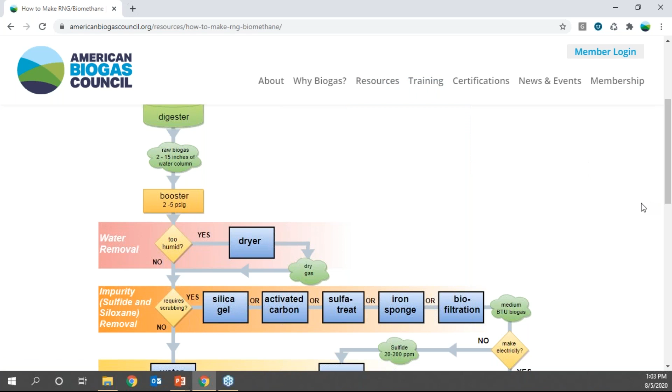We were talking about this a little bit yesterday, and just to put their technology into perspective here, Caroline, if you could go to the flow chart. Their technology is all about biogas upgrading and removing sulfur elements from biogas. If you haven't been to this part of our website, under resources and RNG, there's a flow chart we have for making RNG and biomethane from either digester gas or landfill gas. We've broken down in a very technology agnostic way the different steps and types of technologies that can be used to clean up your biogas to get it to either pipeline quality or maybe a medium BTU quality for vehicles. What we're going to be talking about today is one of the technologies in the orange bar for removing sulfide related and sulfur related impurities.

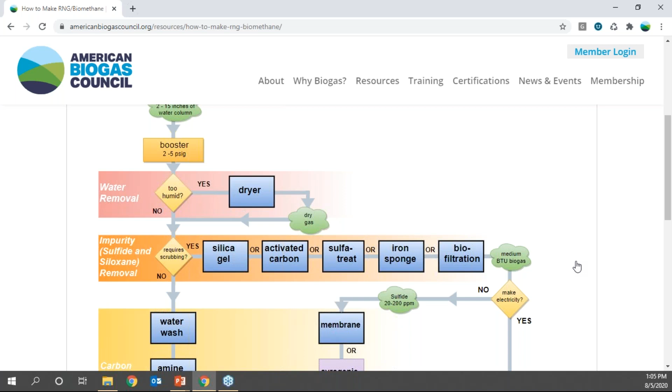One of the nice things is that they don't add oxygen to the gas in the process. So if you're trying to get up to pipeline quality, you don't have to remove that oxygen later to meet your pipeline spec. They've been around for a really long time - they are the original developers of this technology. My understanding is there are a few other companies similar to what they do, but they're very proud of the fact they developed the technology originally themselves, and they'll be able to speak from that experience with many different deployments around the world. We're very grateful to have them as members and to have them with you today.

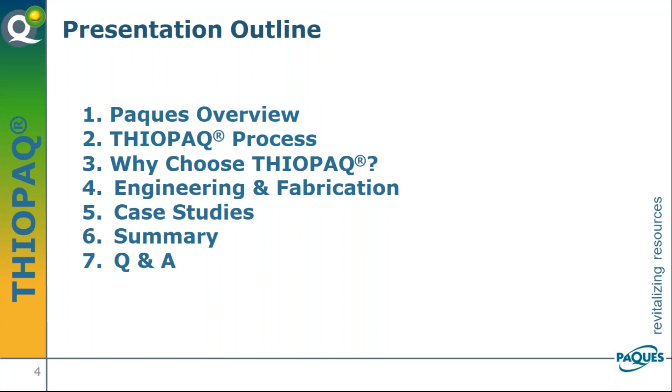This webinar will consist of an overview of Paques, which I will present. Then Andrew, my colleague, will get into the details of the Thiopaq process. I will take over again to discuss why to choose Thiopaq. Andrew will present a summary of the engineering and fabrication details of the Thiopaq systems, and then we'll both present case studies and summarize this webinar with conclusions. I'm going to turn the camera off now, and then we'll get into the presentation.

Paques is a global company. We're big into solving environmental issues, especially wastewater treatment and gas treatment. We were founded in 1960. We got into anaerobic digestion, manure digestion, actually already in the early 70s. But from that grew into anaerobic treatment of industrial wastewater. We're the world leader in that, with about 1,500 plants worldwide.

That anaerobic treatment is mainly to clean wastewater, not so much about biogas production, but of course those plants also produce biogas. From there we got into Thiopaq technology, and that's why we're presenting this webinar today. Our head office is in the Netherlands with about 100 people, and roughly 200 people in our Shanghai office. Also a large office in Chennai, India, a large office in Piracicaba, and our office in Burlington, Massachusetts.

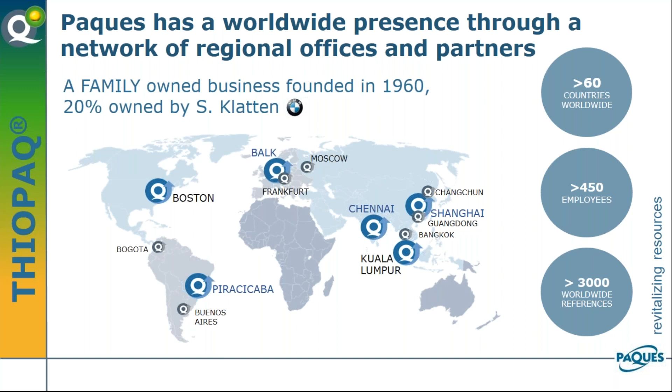The company is family owned, but with a 20% share of Mrs. Susanne Klatten, who is a major shareholder of the BMW company.

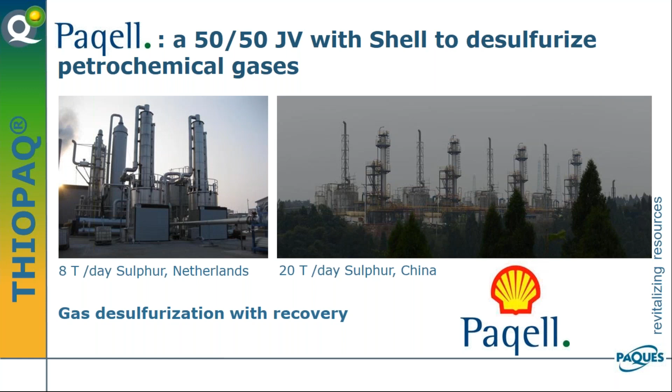We also have a joint venture with Shell. This company is called Paqell for desulfurization applications in the oil and gas industry. So we've done maybe 15 projects or so as Paqell, including projects in the US and Canada with several oil and gas companies.

Paques is known for its biotechnical solutions of wastewater problems and gas treatment. We always work with natural bacteria, so no genetic modification. In the early 80s, we got into high rate anaerobic treatment. We developed several technologies since then, making them more efficient and with smaller footprints, resulting in very slender and tall reactors. Sometimes people call these reactors digesters, but they operate at a retention time of several hours instead of weeks, like a traditional digester.

But remember, these are for industrial applications. We're also into ammonia removal from wastewater - that's our Anammox line, an alternative to conventional nitrification and denitrification. And then, of course, the Thiopaq for hydrogen sulfide removal from biogas and landfill gas. We also have other sulfur technologies - for example, we remove sulfate from polluted groundwater or mining effluent, and as part of that we often convert it into hydrogen sulfide to be able to remove it from water, often by converting it into elemental sulfur.

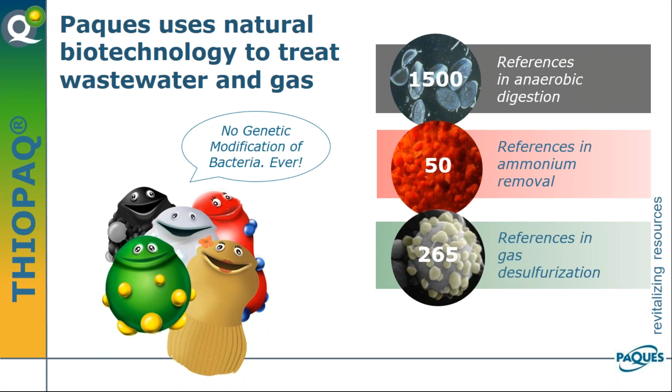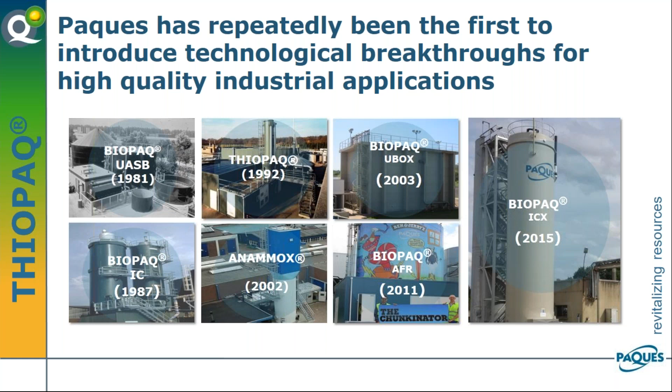These are some pictures of our anaerobic reactors. The UASB goes back all the way to the early 80s, a very well-known technology, up to IC reactors - very slender and tall reactors, up to about 90 feet tall. And nowadays our ICX reactor, a follow-up of our IC reactor. These are used for industrial wastewater treatment - wastewater that doesn't contain a lot of solids, but does have a lot of organic material.

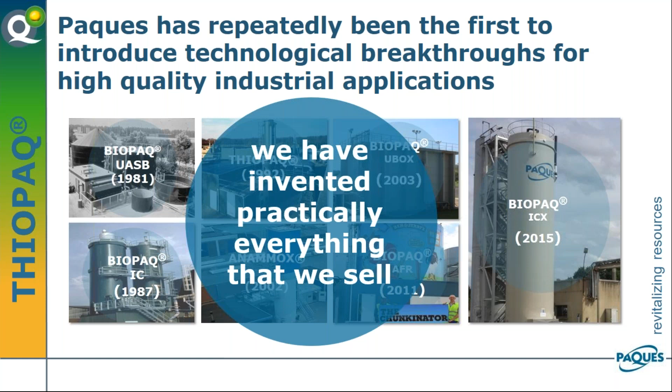Paques has invented most of its own technologies, in cooperation with several universities in the Netherlands and research institutes. We spend a significant portion of our revenue in R&D, and as a result we've been awarded many awards. The latest big thing we're working on is production of bioplastics from organic material in wastewater.

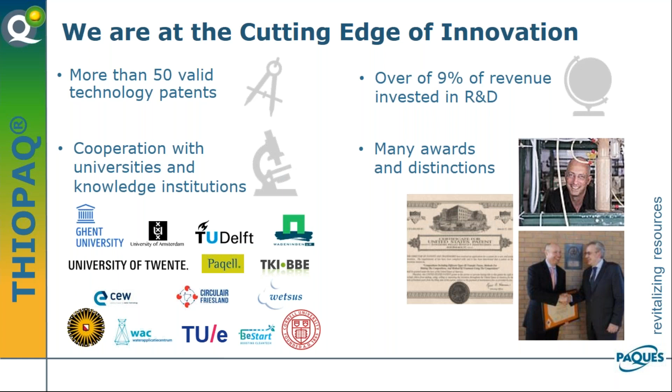Of course, we're here to talk about hydrogen sulfide removal. Probably everybody knows this, but just to capture it: hydrogen sulfide is very toxic, corrosive for equipment, and gets converted into sulfur dioxide upon combustion. So in most cases where you want to use biogas, or even if you just want to combust it, it needs to be removed to meet environmental regulations or to protect equipment. The norm for pipeline gas quality in North America is it should be less than 4 ppm.

Gas engines typically require less than 250 ppm H2S to prevent damage, though it varies. Some gas engines or operators accept more, but that generally results in more maintenance or damage to the engine. Boilers, depending on type, may accept up to 1,000 ppm, though many times they need less than 500 ppm.

Our scrubbers typically take the H2S concentration down to less than 25 ppm. It can be reduced further, but usually it's most cost effective to then polish it with a media-based system to get to very low levels.

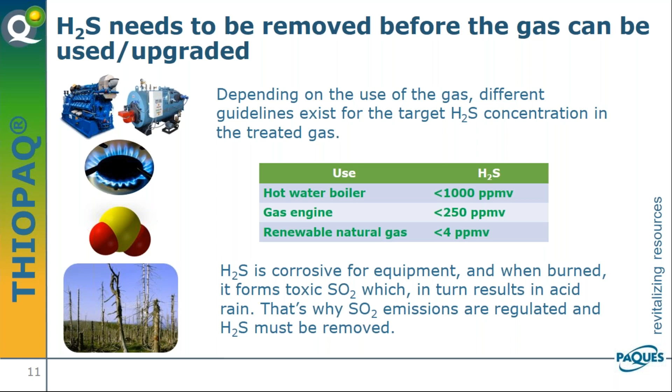Now we'll get into the Thiopaq process in the next slide, please, and then next one.

Sometimes our Thiopaq is called a biological scrubber, even though we ourselves have been culpable for that. But really the scrubber itself is a chemical scrubber, because we use a caustic solution to absorb hydrogen sulfide in the liquid. It's a very dilute solution with a pH of 8 to 8.5, highly buffered by sodium bicarbonate.

I'll describe the process very roughly here, because after this slide Andrew will continue with the details. Hydrogen sulfide is absorbed in the liquid in the scrubber. This liquid flows by gravity from a sump underneath the scrubber to the bioreactor. In this bioreactor, we have a culture of Thiobacillus bacteria. We add a very controlled amount of air to the bioreactor, and the Thiobacillus bacteria oxidize the sulfide to elemental sulfur. Andrew will show that this reaction results in the production of hydroxide.

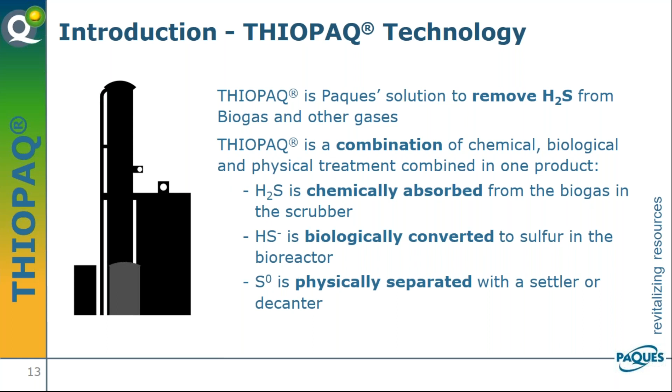For larger applications, say more than roughly 1,000 pounds of sulfur per day, we typically use a decanter, which adds a bit of cost to the system but also results in even lower caustic consumption. Altogether, the big advantage of the technology is that it has the high removal efficiency of a chemical scrubber system, but the low operating cost of a biological system, because we regenerate caustic. Typical caustic use, depending on the application, is somewhere in the range of half a pound to 3/4 of a pound of 100% caustic per pound of sulfur. That makes this system very attractive.

The next slide, please.

The Thiobacillus is a very interesting bacteria. It is a so-called chemolithoautotrophic, halotolerant SOB, and SOB stands for sulfur oxidizing bacteria. It's not what you think. A picture is shown in the top corner on the right, showing one bacterium where you can see how it excretes the elemental sulfur that it forms.

This bacteria is isolated from soda lakes. It's a naturally occurring bacteria that can tolerate very high salt concentrations, which occur in the Thiopaq system. This allows it to operate at these high salt concentrations, meaning we have only a very small bleed stream, which helps assure a very low caustic consumption.

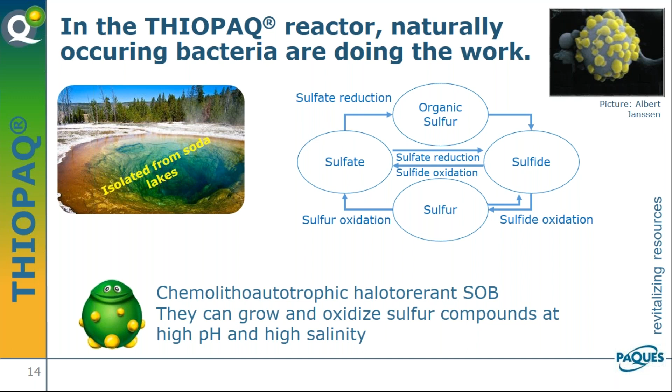With this, I'll hand it over to Andrew, my colleague, and we'll continue with the process. Okay, thanks, Martin. Next slide, please.

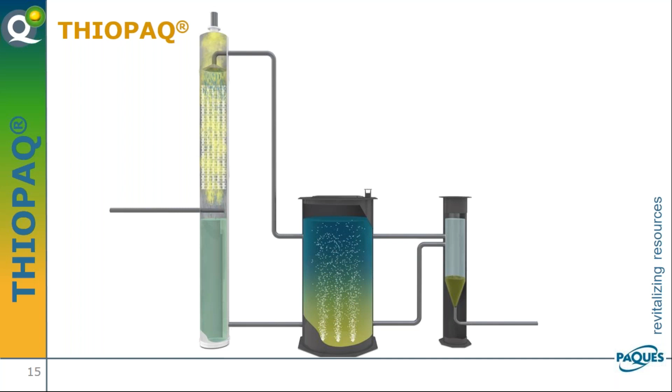This is just a basic schematic of the Thiopaq process. As Martin mentioned, it has three main process components: a scrubbing tower, a bioreactor, and a settler where the sulfur is removed. I'm going to drill down into these steps in the subsequent slides. Next slide, please.

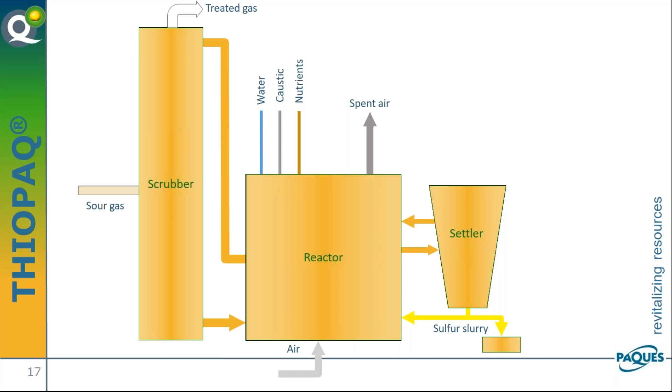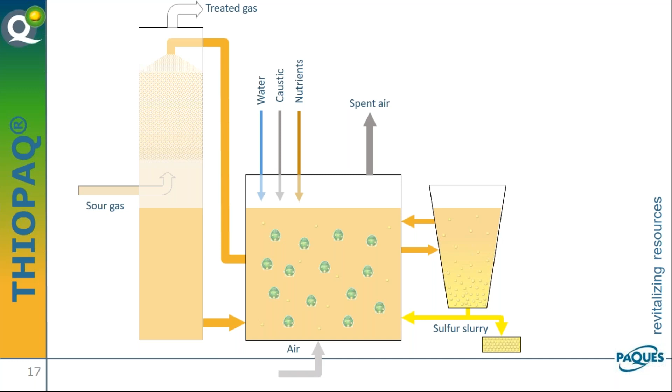The basic process is that the gas containing the H2S enters into the scrubber section, and as Martin mentioned, it's chemically absorbed into an alkaline liquid stream, converted into bisulfide. Once the bisulfide is in solution, it's transferred from the bottom of the sump into the bioreactor.

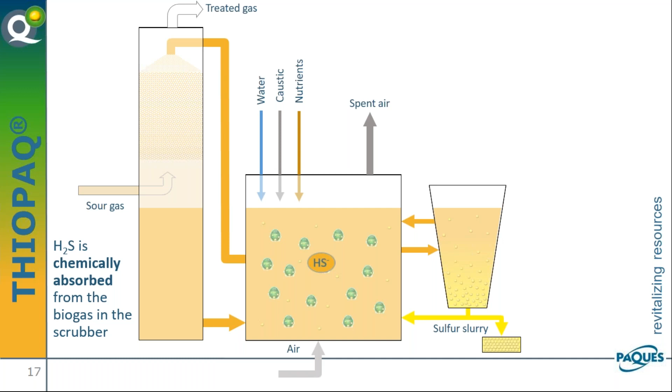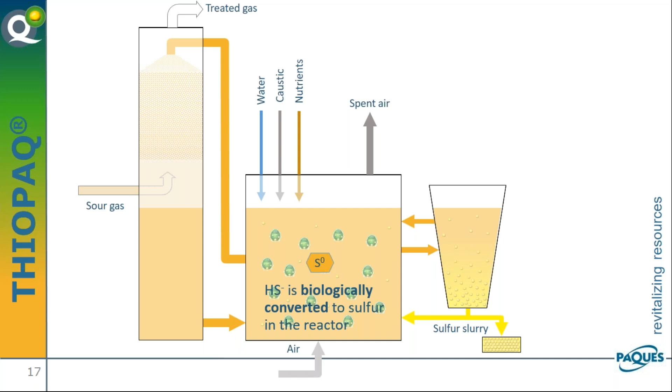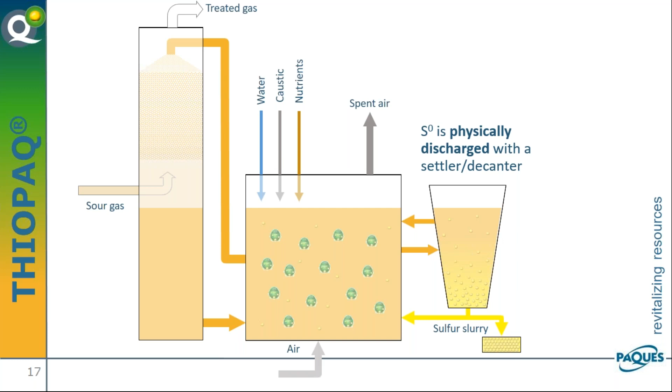Inside the bioreactor is where the hydrogen sulfide is biologically converted to elemental sulfur. A continuous flow from the bioreactor feeds a settler, where the sulfur is allowed to settle by gravity and then is removed from the process. That's the basic process flow, and I'll break it down further into these three components.

In the scrubber tower, it's nothing more than a gas liquid contactor that contains plastic media to provide a high surface area so that absorption of H2S into the liquid phase happens efficiently. The scrubbing solution rains down from the top of the column, goes through the packing section where the liquid comes into contact with the gas traveling upwards, countercurrent to the liquid stream.

The H2S is absorbed in the liquid stream as bisulfide, and the treated gas leaves out the top of the scrubber, and the liquid gravity flows to the scrubber sump, then back to the reactor.

So as you can see from the reaction, and as Martin mentioned, it operates like a chemical scrubber where it's consuming the alkalinity in that conversion to bisulfide. Also note here that there is no oxygen that enters into the scrubber during this process at all. The only oxygen is added in the bioreactor, which I'll talk about next.

So next slide, please.

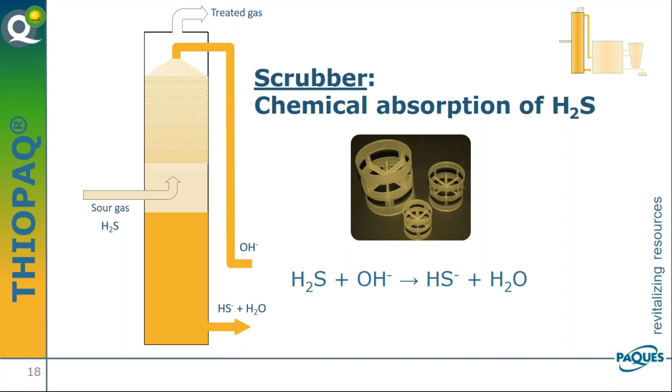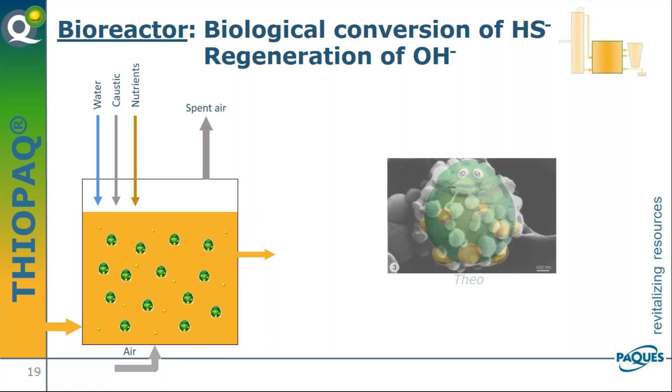So the bioreactor is where the bacteria resides and where all the magic happens with this process. The Thiobacillus bacteria, or better known as Theo, converts the hydrogen sulfide into elemental sulfur. So basically, the process is a biological process. The hydrogen sulfide is consumed, and then the elemental sulfur is excreted out of the bacteria.

The process is slightly exothermic, so we do need to be mindful of temperature. There is a heat exchanger inside our equipment container to maintain the proper temperature, which is around 95 degrees Fahrenheit. We also have a blower that provides air at a very precisely controlled rate through diffuser grids that are at the bottom of the bioreactor.

We also continuously monitor ORP of the solution, and that provides the control of the airflow of the blower speed. We also add a proprietary blend of Paques micronutrients to the solution to keep the bacteria happy and the biological conversion predominant, because you can get chemical sulfur formation, and that's undesirable. So we try to keep the optimum conditions for our friend Theo to do what he needs to do.

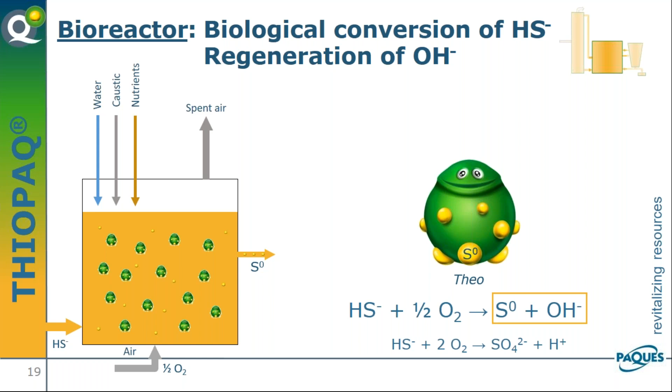I also want to point out that the bacteria and the sulfur particles are hydrophilic. We're running at around 10,000 ppm of solids inside the reactor, and so it all stays in solution. We don't have any problems with plugging because of the nature of these particles. They are hydrophilic, but problems can arise if we're forming too much chemical sulfur through just chemical oxidation of sulfide. That can tend to plug, but by precise control of the process, we're able to maintain favorable conditions in the bioreactor and throughout the scrubber.

Okay, next slide, please.

As I mentioned earlier, the purpose of the settler is to separate the sulfur particles from the liquid and return the liquid stream back to the bioreactor. A small stream from the bioreactor is continuously transferred to the settler, and the solids just gravity settle to the bottom, and the liquid overflows back to the bioreactor, and thereby we recover the alkalinity that's associated with that liquid stream.

Otherwise, we would lose that alkalinity and it would be a waste stream, but that water still has some value, so we want to get it back into the reactor. The sludge at the bottom of the settler is also continuously returned back to the reactor, but occasionally those solids are wasted from the system. The reason we continuously return it is because we want to keep these solids moving.

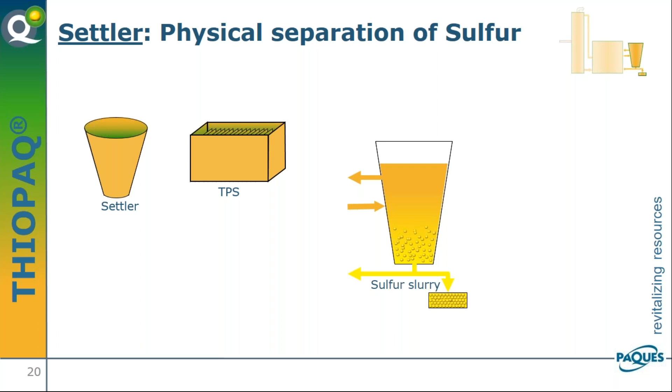So for most applications where the sulfur loads are not so heavy, we'll use just a simple cone bottom tank. For applications where the sulfur load is heavy and we have to manage a lot of solids, we'll use a centrifuge for dewatering. For larger applications, we'll use maybe a centrifuge, and if there's something in between, we may go with a lamella type plate settler to give us good separation. So those are the kind of in-between applications.

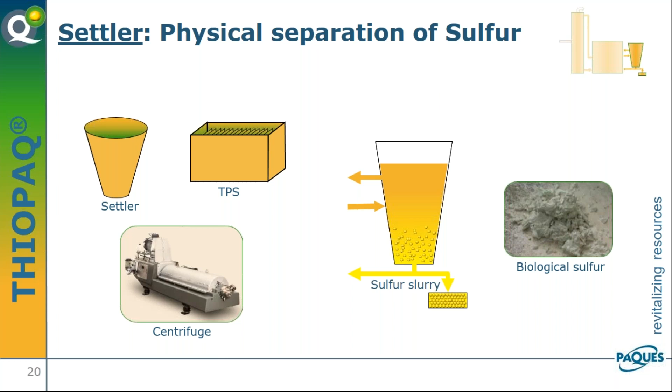So as I said, in a settler, we'll typically get 7, maybe 10% concentration of solids. In a decanter or centrifuge type of arrangement, we can get upwards of 60% or so solids concentration.

So as Martin mentioned, we do get a very high performance out of the scrubber. We can get less than 25 ppm H2S. If you want to incur some higher operating costs, when we have some installations where maybe you run at a higher alkalinity than design, we can get very, very low single digit H2S concentrations. But 25 ppm is generally very doable, and we can provide process guarantees to achieve that. It's a very reliable process with very high uptimes.

Besides having a very stable process, we have standard rotating equipment, pumps, blowers, valves, instruments, etc., that need to be maintained. But we do recommend having critical spares on hand for some of the long lead type items in case there's a replacement that may be required.

One of the key selling features here is the low operational cost. There's no media to replace. Most of the alkalinity is regenerated, and the sulfur is easy to handle. It can generally be put onto land as a soil amendment, or disposed otherwise as a non-hazardous waste. The other main selling feature is that no air is added to the biogas in this process. So safety issues are minimized, and you don't need to remove nitrogen or oxygen downstream in your upgrading process, just the CO2.

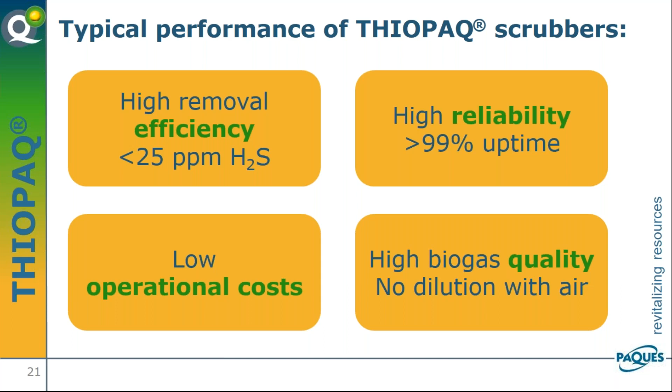So some of the key information that we're looking for when we're designing these systems for you is obviously, we need to know the gas flow. We would like to have average, maximum, and minimum gas flows and H2S concentrations, as well as any special turn down requirements. These systems don't have an infinite turn down, so we like to know as much as possible how the flows and loads in your application might fluctuate, throughout the day or through the season or through a startup, so we can design accordingly.

Maybe you're collecting gas from a cluster of dairies, and not all the dairies are producing biogas yet, and they'll be coming online at various times. So that's good information to know, because we do need to account for low loading conditions at startup, and then as things get online, we can turn things up as needed.

Inlet pressure and temperature are also important to know. It's also very important to know if there are any toxicants like VOCs or volatile fatty acids or solids that might be present in the gas stream.

Keep in mind, we're often the first step in these upgrading processes. So these scrubbers, they act like a big washing machine. Anything that's in the gas stream, these undesirable compounds, they'll just get washed into the scrubber and end up building up in the bioreactor and start to adversely affect the process. So we deal with these compounds by...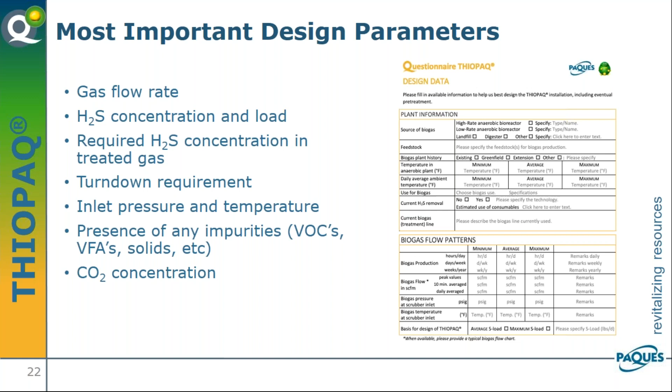Let me just mention real quick here, if I went over that too quickly, if you want to reference, go to YouTube and search for Thiopaq, Paques Thiopaq, and there's a nice little animation video, about 3 or 4 minutes, that kind of goes over the Thiopaq process.

Okay, so I'll turn it back over to Martin, and he can talk about why you should choose Thiopaq. Yeah, thanks, Andrew.

The sulfur that is generated is very pure, typically 99% pure, and it can be used as a fertilizer. Paques is setting up a network to recover sulfur from many facilities, to be able to use it as a fertilizer.

So please, next slide.

So why would you choose a Thiopaq scrubber for your desulfurization project? Well, first of all, it has a very wide application range, and I'll show that in a few slides. It's a robust and reliable technology that's been around for almost 30 years.

Some people don't like biological processes, but all the hydrogen sulfide is produced by bacteria, and there's nothing wrong with removing it with bacteria either. These bacteria live naturally under very tough circumstances, and under the conditions we apply they're very fast growing. Should there be a mishap, these bacteria can actually be stored and survive for months without feeding, just by setting them aside in totes.

And should something go wrong, you can very quickly reseed your bioreactor and start up again. The reliability, our uptime for most plants is 99%, and in certain cases, if certain conditions are met, we can guarantee an uptime.

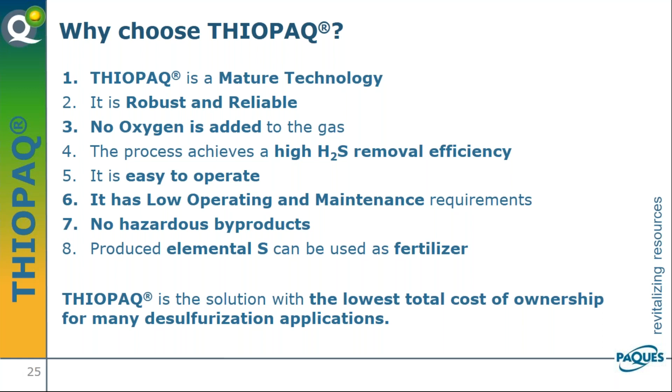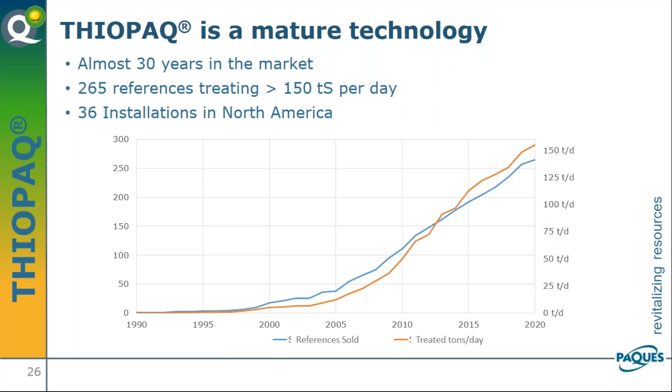It shows the number of units installed since the first one. The first one was installed in 1993. By now, a total of 265 have been sold, with about 10 or 15 underway, and a total of approximately 150 metric tons of sulfur per day is removed worldwide. In North America - US, Canada, and counting Puerto Rico - we have 36 installations. Next slide.

So our applications, in terms of sulfur load, landfill takes up the biggest part of it, because landfills where we have systems tend to have very large flows, and sometimes also very high concentrations. Not always - they can also have like 700 ppm or so, but they typically have very high flows. The pulp and paper industry, that's where our first one was installed. The gas flows are not as high, but they tend to have like 1% or so hydrogen sulfide in their gas.

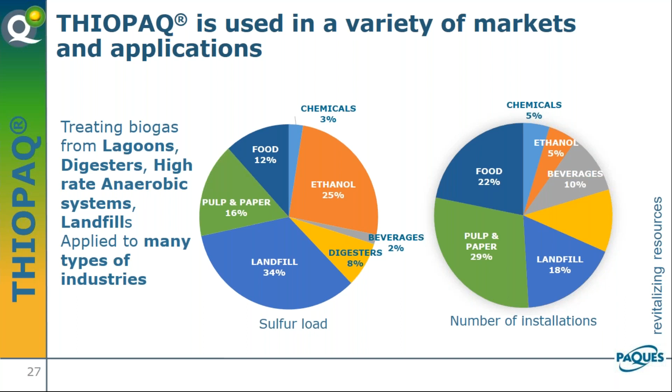And then many other applications in the food industry, ethanol industry, chemical industry also, and then digesters. There's not that many in digesters yet, but this is, of course, a very big market now, where all these big dairy digesters that produce biogas - that's a very good application for us. Next slide, please.

So where is the Thiopaq applicable? Anywhere where the hydrogen sulfide concentration is more than 500 ppm in gas, I must say, and not in air, because there's just too much oxygen in air. So in gas, more than 500 ppm. When it becomes attractive depends on other factors as well, but the minimum load would be about 60 pounds per day.

And just to give you an idea, we think that the total cost of ownership within a 3 year time frame or so is less than a media-based system, if you are dealing with a sulfur load of about 150 pounds per day or more. The pressure range is basically - well, we operate some landfills at minus 200 inches water column, and in the oil and gas industry, we have a plant running at 75 bar or 1,000 psi.

The bacteria don't really care about this pressure, but of course the scrubber column has to be designed properly for it. A typical turn down ratio for our plants is 4:1, but if we know ahead of time that more turn down is required, the maximum turn down ratio is a factor of 10.

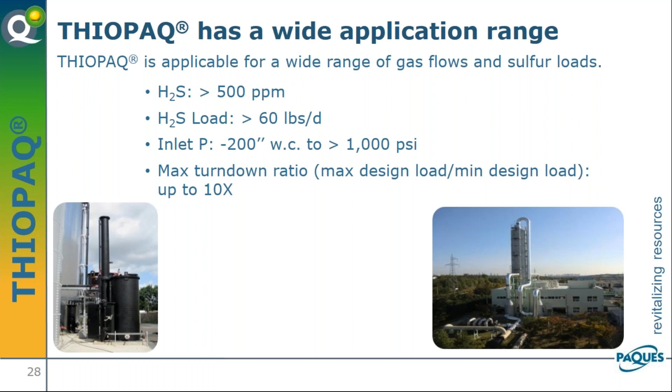If you get into very large sulfur loads or very high flows, we cannot use these standardized units anymore because the pumps get too big, and many times a decanter is required. So we then do all the process engineering and provide all the process equipment, like all the vessels, the pumps, the heating and cooling equipment, instrumentation, etc., and do the commissioning and startup.

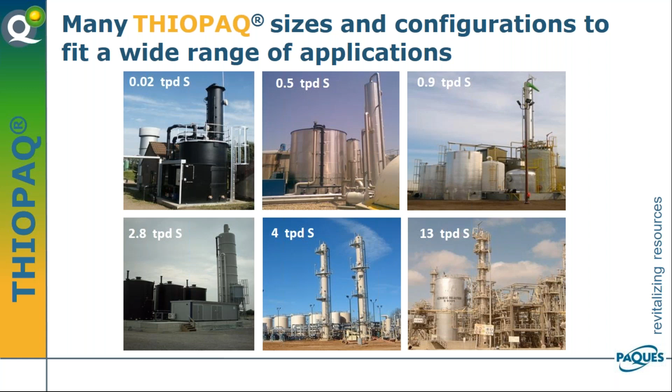We already talked about low operating and maintenance requirements. So besides the chemicals, utilities required are some makeup water, power, some instrument air, and for most applications you need either some heating or cooling, but it's not always required.

The waste stream produced for smaller applications, like the typical cow manure application, gives you a slurry from the settling tank that has 5 to 10% sulfur in it, plus some salts, and that can be blended with a digestate, for example, or if you have an aerated lagoon, it could be discharged there.

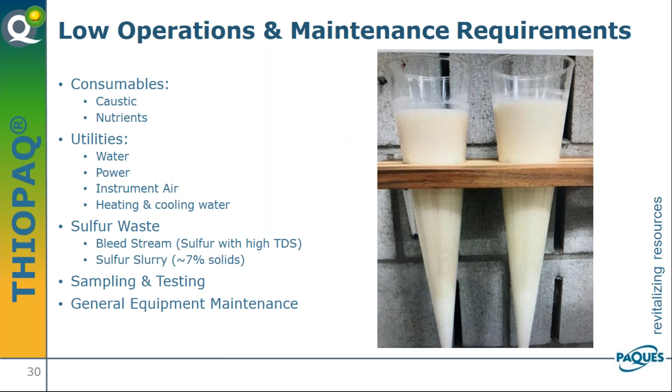I would say the major advantages, if you summarize it, is we have a reliable system that provides high uptime. There are unfortunately also some copycats - several companies in the U.S. and also outside, in Europe and China, everywhere, that copy these systems, but often the fundamental knowledge is not there to guarantee a very reliable system. And if you have any amount of downtime, it gets very costly if you produce RNG. So I think we have a big advantage there.

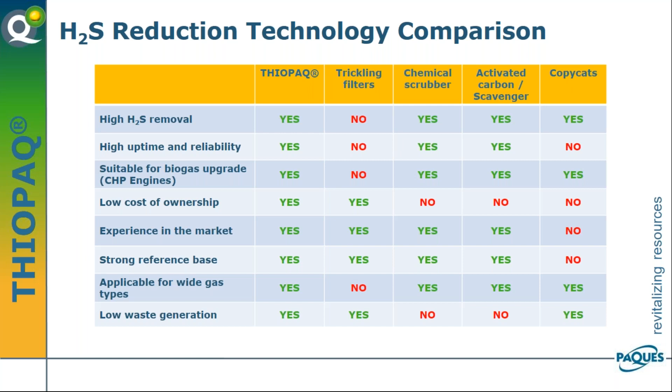So I wanted to make a couple of points that maybe I glossed over before. As Martin mentioned, we have several sizes. There's some standard sizes, but also multiple configurations. Generally, the diameter of the scrubber is determined by the gas flow. The more gas flow you have, the bigger diameter you have.

The bioreactor is designed based on the loading. If you have a lot of pounds of sulfur coming in on a daily basis, the bioreactor is bigger, the blower is bigger. But there's some cases where we can have multiple configurations. You'll see in some of the case studies, you can have 2 trains, a scrubber with 2 bioreactors, or 2 scrubbers with 1 bioreactor. There's really an endless way to configure these things to meet the requirements of the project.

As far as engineering and fabrication, with Paques you get a complete comprehensive engineering package with our projects. We do a complete mass and energy balance. We have a process flow diagram with stream numbers, and each of those stream numbers gives you the constituents of that stream, so you can see how things change as you flow through the process. That's valuable information when you're integrating these RNG upgrading projects.

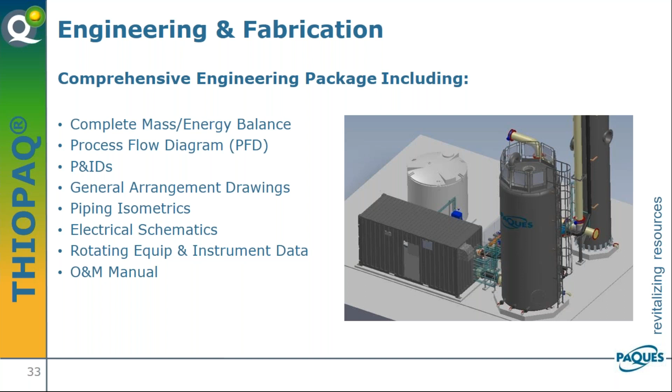So the tanks are typically made of fiberglass or HDPE. For some higher pressure or vacuum applications, we'll probably need a different material like stainless steel. But the majority of applications we're seeing in landfills and dairies are at relatively low pressures, operating at pressure, not at vacuum.

As I mentioned, the equipment is pre-installed inside a 20-foot high cube container. It's completely renovated. Everything's insulated, the walls, the ceiling are insulated. A steel floor is put in. We have HVAC, ventilation fan, air conditioning, heating, lighting, and a man door on the side. So all the major equipment is installed in here to the maximum extent.

And we use major equipment that you're used to seeing, that you'd expect in this kind of installation - Goulds pumps or Fybroc, Endress+Hauser instruments, that sort of stuff. So readily available parts.

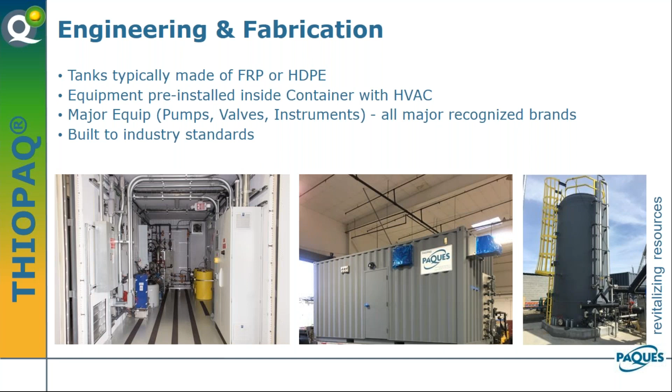As far as the controls, it's a fully automated process, PLC controlled. All the electronics are installed in a UL 508A panel. We use a Compact Logix Allen Bradley PLC with an HMI interface where all the operator functionality takes place. There's data trending where we can look at key variables and how they change maybe over a 24-hour period. It's a very nice interactive display to give the operator the data he needs and the ability to control everything that needs to be done.

We also have the ability, and we like to get a VPN connection. We have a network switch inside the panel where, if we get set up with a VPN, we're able to remotely access the controls. And if you get into a pickle, we can quickly respond and make whatever changes, help with troubleshooting, see what you're seeing in the field, and get you back on your way.

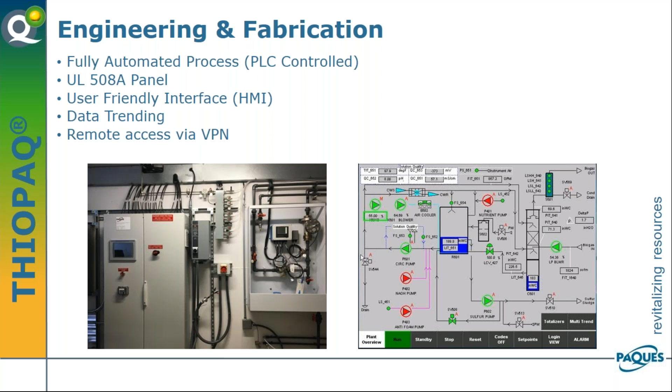Okay, so now we're going to go over some case studies and I'll flip it back over to Martin.

Yeah, I'll briefly discuss two case studies. First, this one - I selected it for two reasons. First of all, because it's our first plant that was built in 1993, and it's still in operation and doing well.

Something else that makes this plant very interesting is that it treats the biogas from an anaerobic reactor that treats effluent from three separate paper mill companies. So it sees a lot of variation in flow from these mills, because they can all of a sudden dump a lot of water and then nothing, and also variations in gas flow composition. Don't forget that these anaerobic reactors work at retention times of, I'd say, somewhere around 6 to 10 hours, so gas production can change dramatically within an hour.

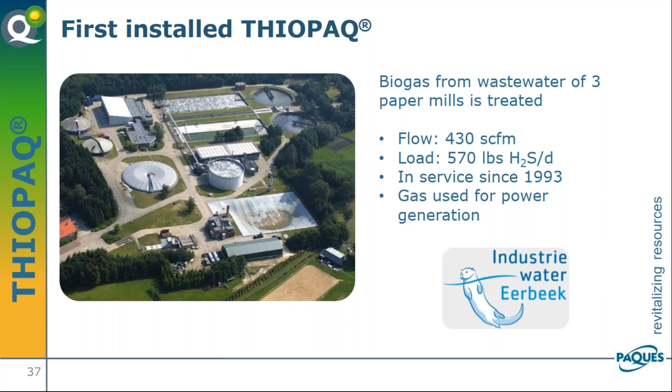So on this slide you see the Thiopaq, you see the entire treatment plant. The anaerobic reactor is kind of in the center with the white covers there. The Thiopaq is located nearby, it's kind of hard to see, but it's in one of the next slides. Next slide, please.

The name of that company is Industriewater. Here you see the results of the last 11 years of operation. The influent gas concentration varies typically between 5,000 and 10,000 ppm, and the outgoing concentration is generally less than 50 ppm. Over 11 years of operation, you just see a few hiccups, just indicating how stable this process has been working. Next slide.

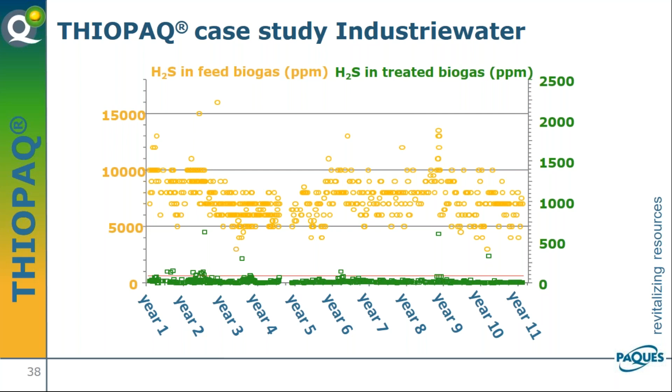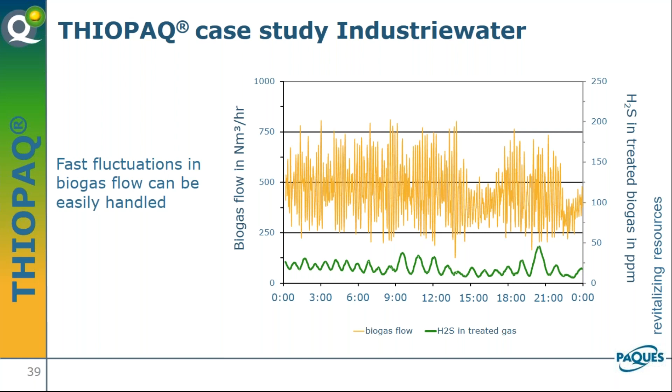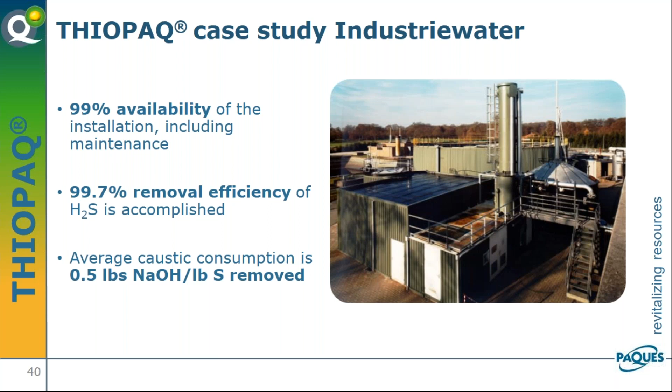The uptime of this facility has been 99%. The average removal efficiency is 99.7%. The average caustic use has been half a pound of 100% sodium hydroxide per pound of sulfur removed. Next slide, please.

This is a different plant, one of our more recent installs, at a landfill in Quebec. This plant was started up sometime in April last year, so it's been in operation for a little over a year. It was designed for 6,000 CFM and is treating all the gas, but getting on average a little less than that. These are average numbers for the last year of operation.

Hydrogen sulfide going in is 771 ppm on average. The design number was, I believe, 1300 ppm, so it's a little lower than design. We designed it to achieve less than 25 ppm, a number that we guaranteed. The actual number was 0.5 ppm or less, so I rounded it off to 0. The sulfur load is 530 pounds per day, and at this plant we have a decanter to dry the sulfur.

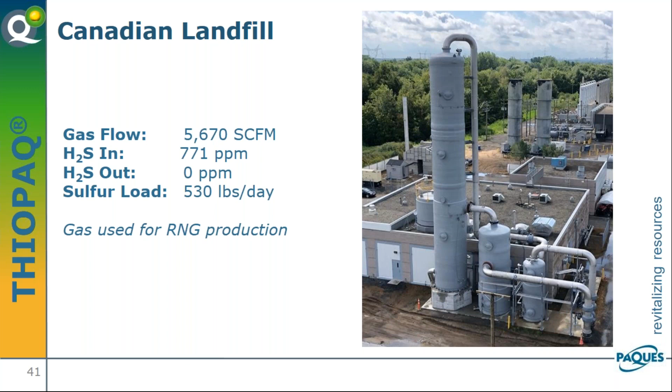I think that's it for me. I'll hand it over to Andrew again.

Andrew, your turn again. Okay, next slide, please.

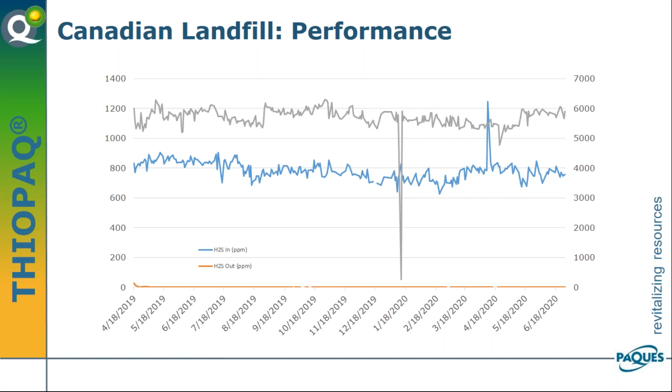So we have a Thiopaq installation at a large rum distillery in Puerto Rico that we recently commissioned about a year or so ago. It's already weathered a couple of hurricanes and is still standing and operating pretty well. In this project, the treated gas is used as a fuel source for the distillery's boilers, and it saves them quite a bit of money on fuel for their boilers.

As you can see, the loading on this system is quite high. It's designed to treat about 3,000 SCFM with H2S concentrations of around 17,000 ppm. The system was installed to replace an iron chelating type system where the customer was having issues with plugging due to high sulfur concentrations and just general solids management.

They had two large plate and frame filter presses that required a lot of labor and had higher than expected operating costs, plus general difficulty managing the process. So we came in and replaced that system with a Thiopaq process.

The distillery operates in a campaign mode where they'll run continuously for about 3 months, then shut down for about 2 weeks. During those 2 weeks, they have very minimal gas flow, so we took that into consideration when we configured this system.

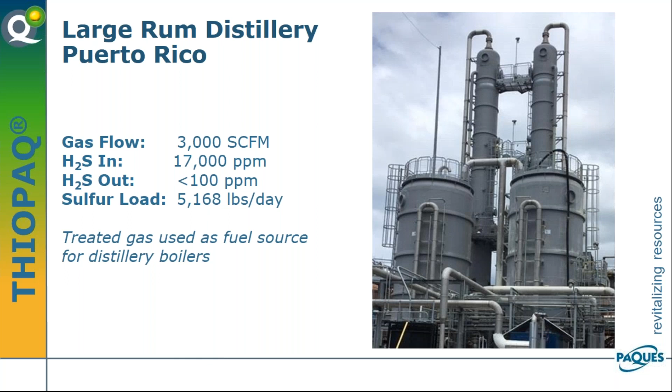This is an installation in Oregon at a large dairy manure facility, around 20 or 25,000 head of cattle. We're treating about 1,800 CFM of gas. H2S concentration is 2,000 ppm, with a sulfur load of about 300 pounds per day. This is the first step in the upgrading process.

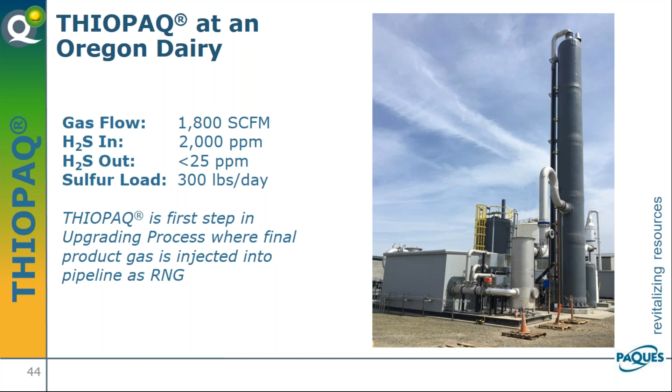There is an amine process provided by Pure Gas, Wärtsilä Pure Gas, downstream of this system. Then there's moisture removal, and then the system goes on to pipeline injection.

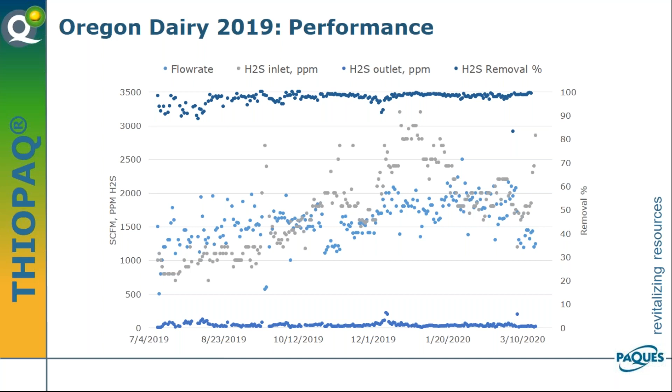Another dairy in Idaho. This is an RNG upgrading plant, similar to Oregon but a little smaller, 950 CFM, H2S around 3,000 ppm, outlet H2S 25 ppm as well. Again, downstream of the Paques system, there's an Air Liquide membrane process for CO2 removal.

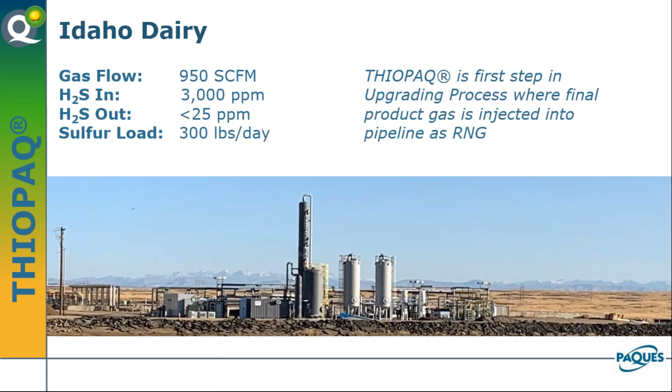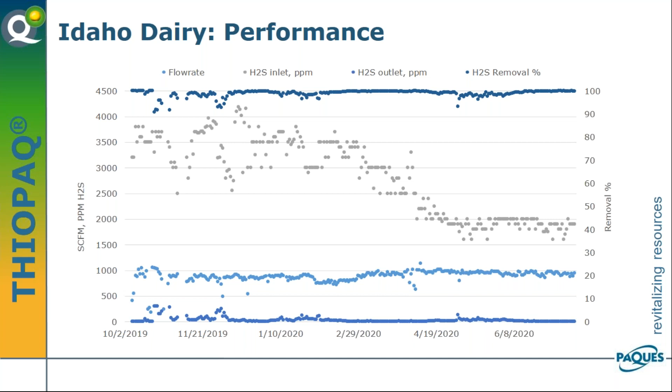Basically, again, very stable effluent H2S, very stable H2S removal here. So I think that's it for me. I'll send it back to Martin, and we'll get this summarized and wrap up.

Summarizing, the Thiopaq scrubber has been around quite a while, and it's been a proven and reliable process to remove hydrogen sulfide from biogas, landfill gas, and other gases. It's applicable to a wide range of gas flows and sulfur loads, and it has low O&M cost and low total cost of ownership.

What distinguishes us from other companies is that we have a long track record as the developers of this process, with 30 years of experience. We know how to properly design a system, with experience in-house and in North America to prevent problems, execute projects, and provide technical support on very short notice if needed.